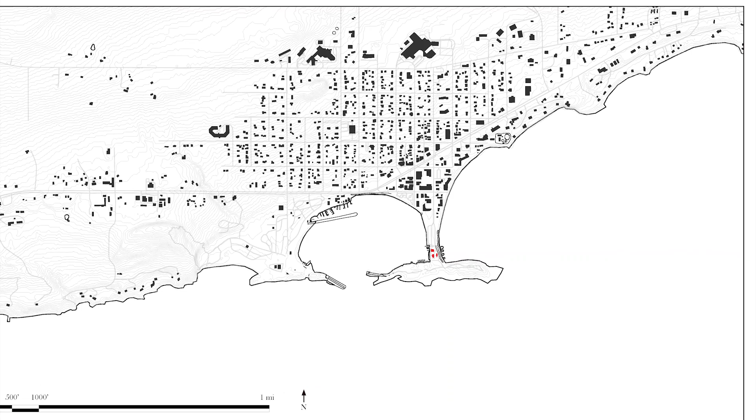Hi, I'm Fran Di Caprio. I'm from the Twin Cities, and I'm a student in the University of Minnesota's Masters of Architecture program. The project I submitted for consideration is a maritime museum in the northern Minnesota town of Grand Marais.

There's a small Coast Guard complex in Grand Marais that sits along an isthmus that projects into Lake Superior. At the tip of the peninsula, there's a popular recreation space called Artist Point, used by locals and the many tourists that come in the warmer months. The Coast Guard buildings were officially decommissioned in the summer of 2022, opening up an exciting possibility for the community to reimagine what this unique place could be.

My design approach focused on welcoming the community back to the land now that the Coast Guard had turned the site over to the city. Through a series of interventions, the entirety of the isthmus becomes a destination, instead of just a liminal space that people pass through to access the end of the peninsula.

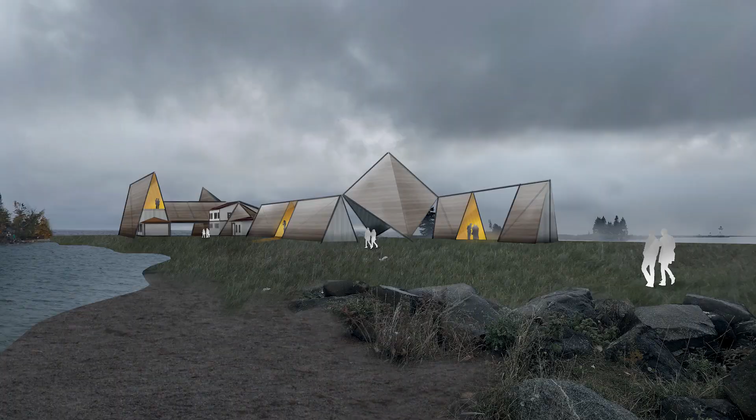I saw the potential for a new development to ameliorate what I perceived as injustices to the land and the community. First, I wanted to remove the parking lot that dominates so much of the isthmus right now. Crossing the large parking lot is not a pleasant arrival to this otherwise beautiful site, so by tearing it up and rewilding that land with native plants, the site becomes much more welcoming.

Second, I wanted to radically change the existing Coast Guard buildings by converting them into open-air gathering and performance spaces. In my view, the Coast Guard buildings are directly linked to the history of the US government's forceful removal of indigenous peoples from the region.

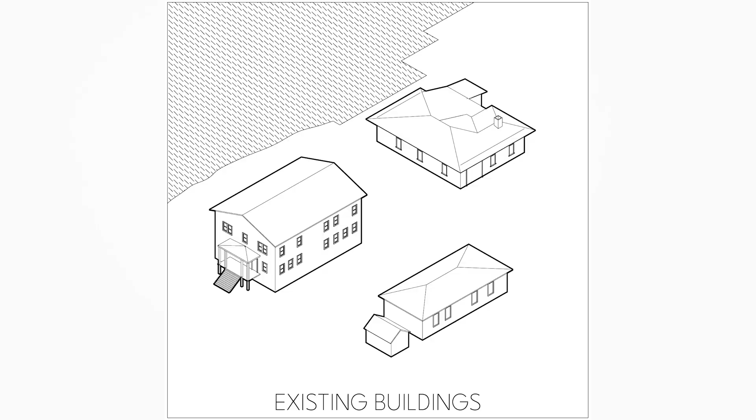Though it would be unsustainable to simply demolish the buildings, I wanted to present a fresh start to the community, one that reevaluated the history of colonization in the region. A radical deconstruction of the Coast Guard buildings expressed this intent.

The roofs, concrete bases, and main structure are preserved, with the remainder of the buildings removed, literally opening these structures that were previously closed off to the community. Some of the wood cladding could potentially be salvaged to clad the new construction.

With new structure added, the garage, shed, and boathouse become open-air pavilions, while the main building becomes the stage of an amphitheater, with seating for it stretching over the garage.

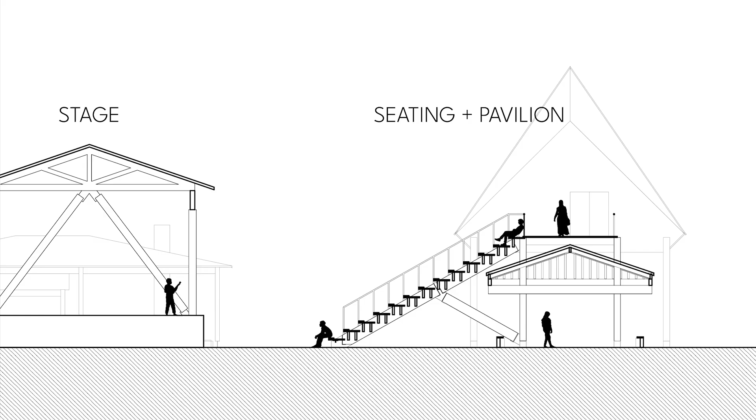Third and finally, several small-scale new buildings housing the museum program are placed across the site. By spreading the museum into many smaller buildings, no single building dominates the landscape, and the entire length of the isthmus becomes activated by the museum's program.

The design was inspired by the birch bark canoes made by the indigenous Anishinaabe people. Traditionally, a canoe was made from local materials, could be used in a variety of functional ways, and could be scaled to many lengths and sizes.

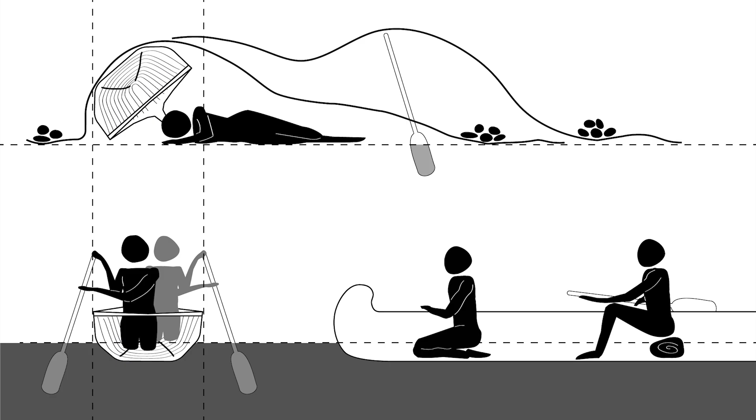Studying birch bark canoes inspired me to develop a modular architectural unit that could be built sustainably and serve a variety of purposes. Experimenting with physical models developed into a simple triangulated unit, which could be strung together, bent, and intersected with itself to produce a large variety of forms.

As I developed this architectural module, it gave me a lot of freedom to play with different arrangements of buildings across the site. My project emphasizes sustainable wood construction methods.

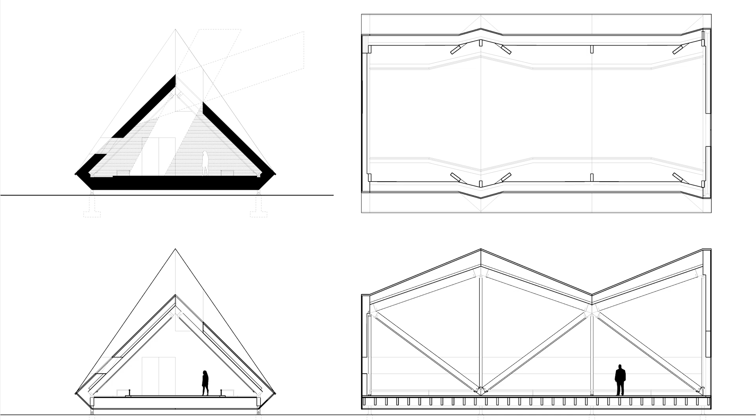The whole structure is elevated off the ground, which minimizes the use of steel and concrete for foundations, while also allowing the building to avoid water damage from the frequent flooding in the area around the lake.

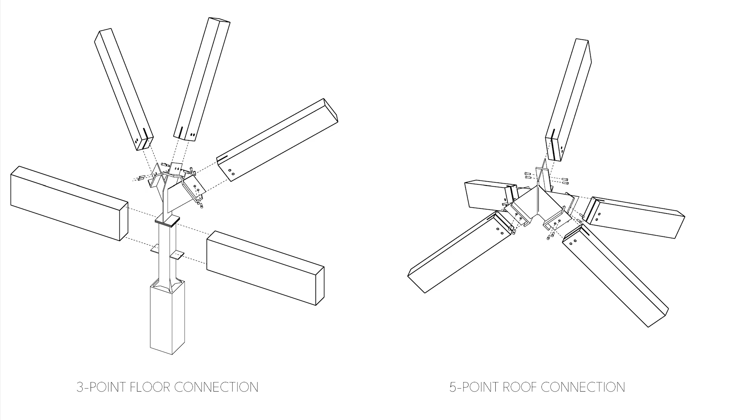The structure is made of engineered wood products, namely glue-laminated timber beams, supporting dowel-laminated wood panels. The exterior cladding is all wood as well. Large southern-facing clerestory windows admit lots of light to warm the space in the winter.

The final site plan involved 8 new buildings, each with a distinct programmatic function. The buildings were arranged to provide a winding central path across the isthmus, while maintaining access to the water to the east and west. The buildings are spread out to ensure a view of the lake is maintained at any point along the main path.

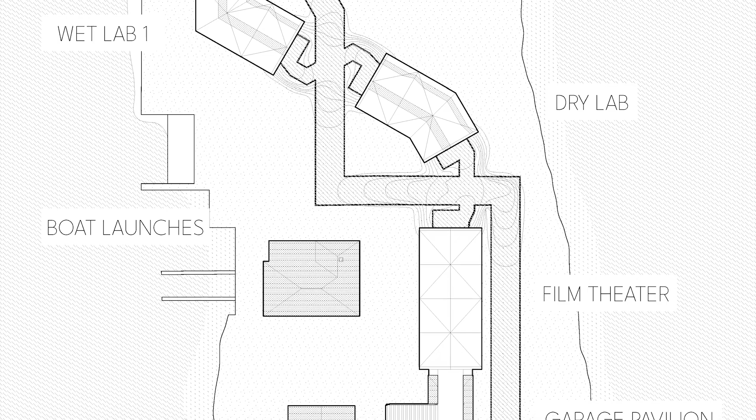Public-facing functions, like the lobby, main hall, cafe, and exhibit spaces, are clustered to the north near the start of the peninsula, while more private functions, like the research and staff spaces, are further to the south. My hope is that this design preserves what the community already loves about the site, while welcoming more people to the beautiful and unique space.

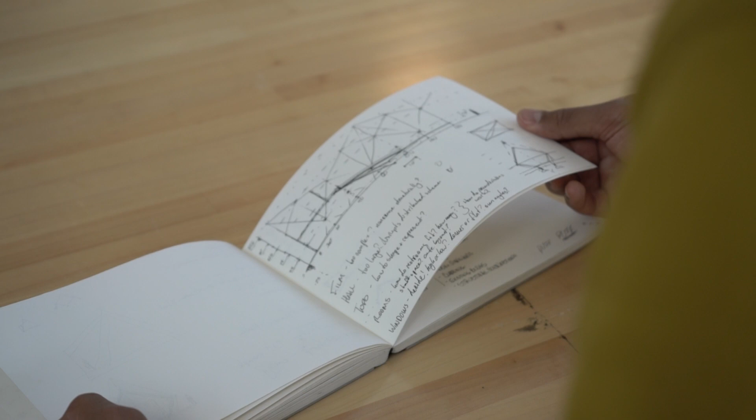I think my approach to design would fit well within Gensler. From what I've seen from Gensler, I resonate with their focus on the future and their ability to adapt to the rapidly changing state of architecture. I see an environment that encourages individuals to grow and learn, while staying committed to collaboratively producing high-quality work.